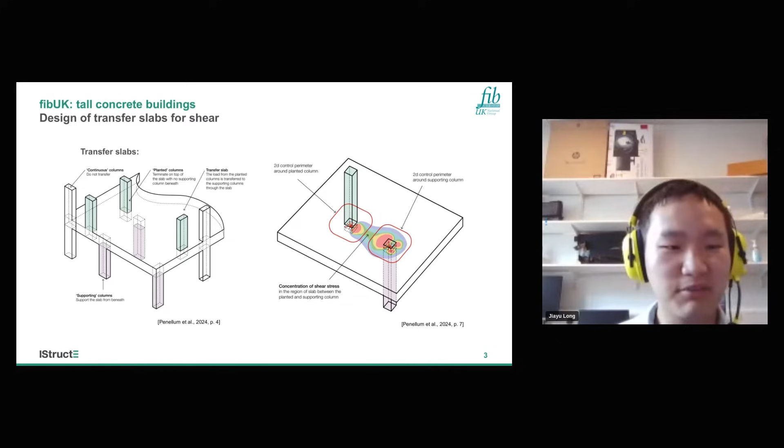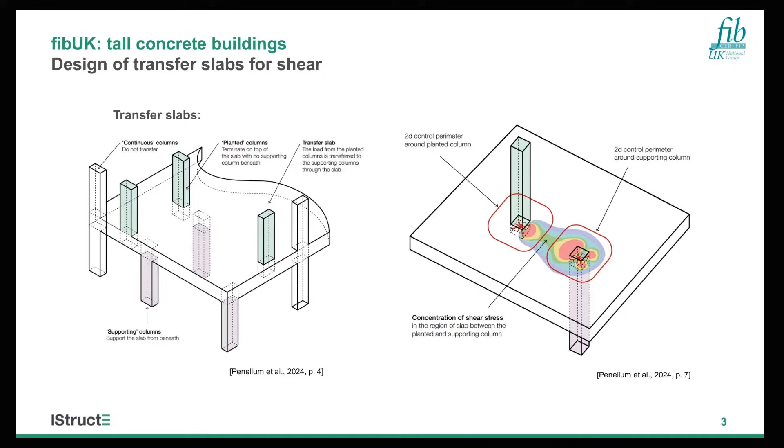So what is a transfer slab? This is a type of structural member often used in multi-story buildings where upper floors and lower floors are of different usages. Each of these floors may require different column arrangements to optimize the space, leading to a deviated column layout. The right figure shows the typical concentration of shear force in a transfer slab. As you can see, it's very complicated, and this complex shear force distribution can lead to different possible failure modes.

Moving back to transfer slabs, the only research on this type of structure is by Wang and Vollum, who looked at transfer slabs with closely offset columns. Their research found that within two effective depths, so within 2D, the shear resistance is increased by the direct strutting action, and the diagonal cracks are reduced. As a result, the concrete resistance is increased by this triaxial compression, but what happens when the shear span is greater than 2D remains unknown.

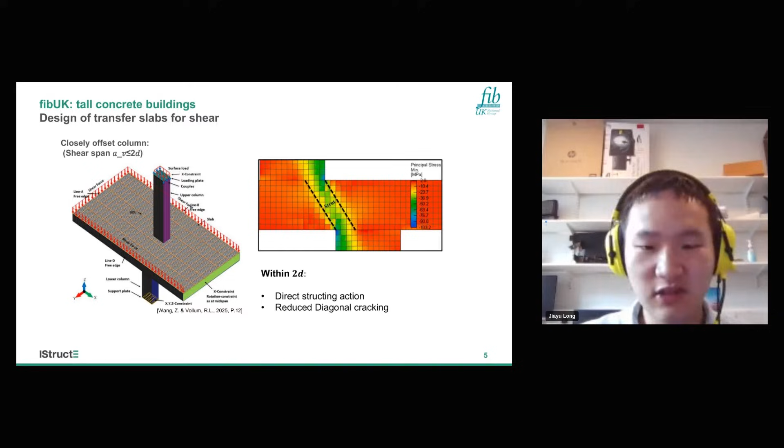To investigate this problem, I use NLFEA software ATENA to determine the failure mechanism. The modeling parameters on reinforced concrete were adopted by Wang, which was validated on previous punching tests, as well as the tests of Wang and Vollum, in which specimens were loaded under combined upper plate loading and perimeter loading, as the figure on the left shows, and detailed material parameters are listed in the right figure.

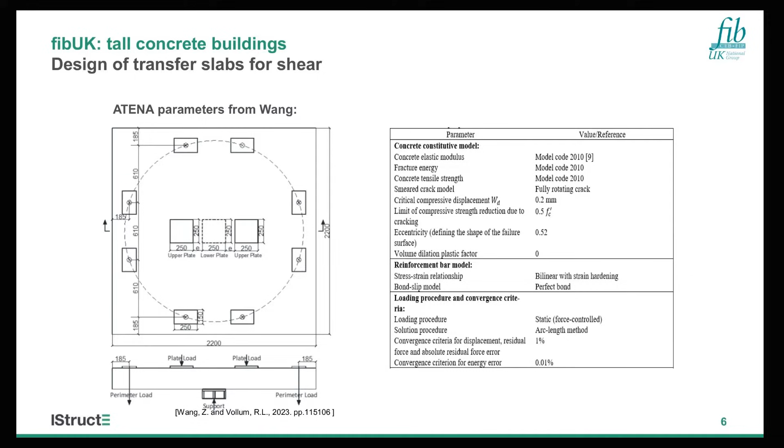We're using a rotating crack model for concrete with compressive displacement of 0.2 millimeter and compressive strength reduction of half of concrete strength.

After that, we started to look at a typical transfer slab structure. The geometry of the structure is as the figure shows. The two major loadings we consider are the upper column load, which is the load induced from the planted column, and the UDL load, the uniformly distributed load acting on the slab.

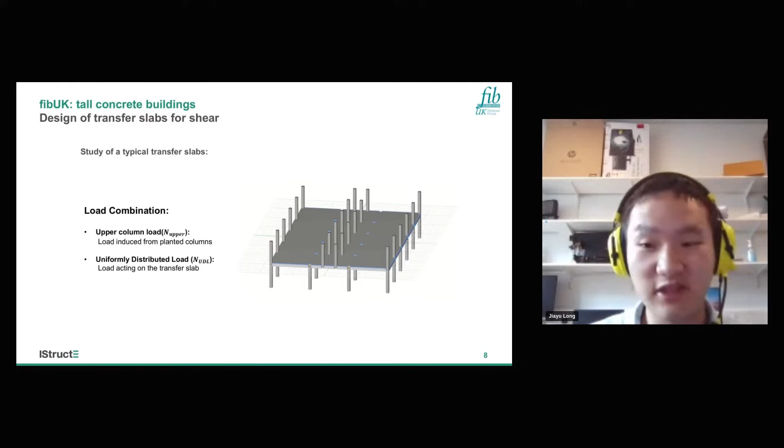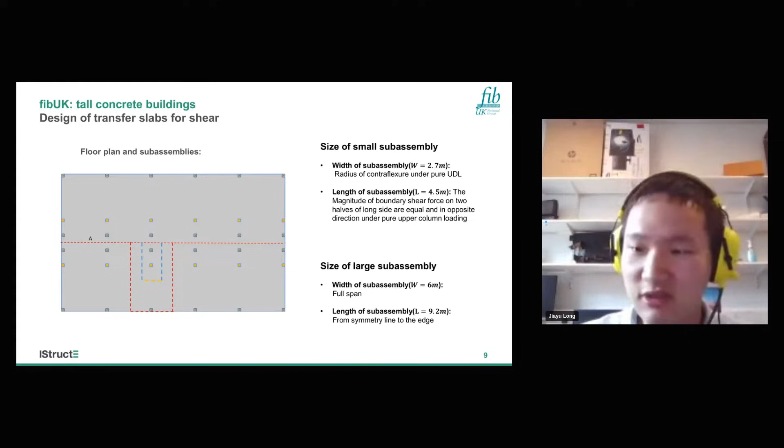The next slide shows the dimensions of the two subassemblies. The material parameters are listed on the left. The effective depth is taken as 400 millimeters. Reinforcement ratio in top and bottom, longitudinal and transverse directions, are all 20 at 150 millimeter spacing. This is a typical reinforcement ratio used in practice.

The lower column is kept at the same distance, and the relative location of the upper column changes so that the shear span varies from 2D, 3D to 4D.

Apart from ultimate failure load, it is also important to know the failure mode of the structure. So what is the failure mode? Is it punching failure or linear shear failure? Does the failure happen around the upper column or lower column? One way of distinguishing it is to examine the critical cracks at the ultimate failure step, but sometimes it can be very hard to tell the difference between cracks of linear shear failure and punching shear failure. For example, as the two figures on the left show, the cracks around the upper column resemble each other, but the top figure is failure by punching shear, whereas the bottom figure is failure by linear shear.

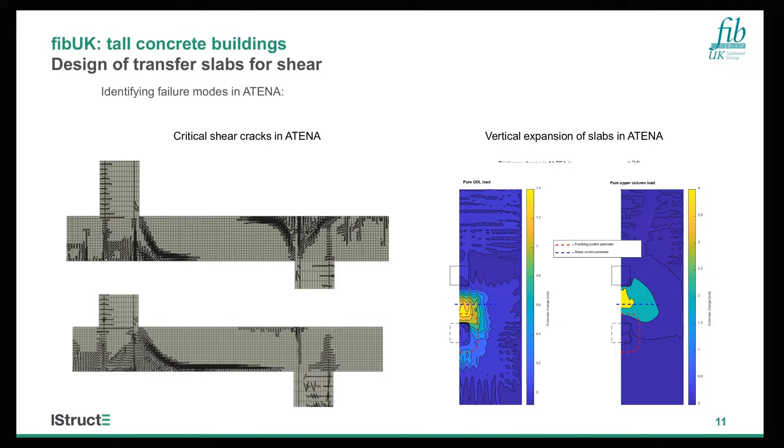So we did extra things to distinguish the failure mechanism. We found out that for the tests in the laboratory, the critical shear cracks are associated with thickness change. A new way to monitor the vertical expansion in ATENA is developed. If there is a thickness change around 0.5D away from the column, then it is likely to be failure by punching. If the thickness change is around 1D, then it's more likely to be failure by linear shear failure.

Moving to the next slide is the interaction diagram of my ATENA results from 2D to 4D gap. The x-axis is the total UDL load on the slab, whereas the y-axis is the upper column loading. The green dots are slabs that failed by punching, and red rectangles are slabs failed by linear shear. On the pure UDL load, so when the y-axis equals 0, all subassemblies failed by punching around the lower columns, and failure loads are similar for small and large subassemblies.

But interesting things happen when the upper column load increases. The ultimate failure load of small subassemblies drops much quicker than the large subassembly. The small subassembly begins to fail by linear shear, whereas large subassemblies are still experiencing punching failure. We believe that the reduction of ultimate failure load with upper column loading is associated with the shift of failure modes.

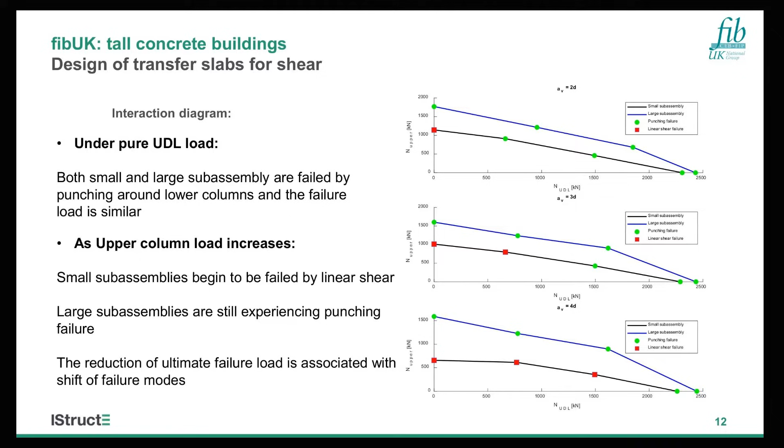It is found out that the failure mechanism is largely influenced by the width of the subassembly. As the width of the subassembly decreases, the failure load decreases and the failure mode shifts from punching shear to linear shear. Besides, the failure location changes from both columns to just around the upper column as the length of the subassembly decreases.

Furthermore, the evolution of shear force over width of the subassembly is compared for each D along the gap. The shear force in the diagrams is normalized so that the lower column axial load equals 1 kilonewton. It is found out that shear redistribution occurs over the 6 meter and 4.5 meter width subassembly midway between two columns, but not over the 2.7 meter wide subassembly. This suggests that the 2.7 meter subassembly does not capture the shear redistribution behavior well.

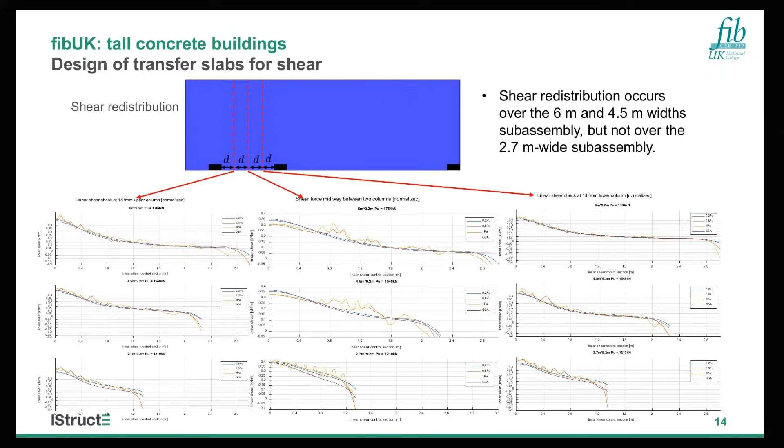Besides, we also calculate the shear resistance using the next generation of Eurocode 2 with LFEA software GSA. The formulas on the left are the shear checks we use for calculation. The punching shear check is made at 0.5D around both columns, whereas the linear shear check is made at 1D away from both columns and midway in between over a width of 4D. When calculating punching shear resistance, there's a factor beta E, which accounts for the concentration of shear force, and it is calculated based on the shear field analysis.

As the right formula shows, the V perp ave in the equation is the average perpendicular shear force. In the calculation, the critical length can be chosen to be either a quarter of the perimeter or a half of the perimeter, denoted as punching half and punching quarter.

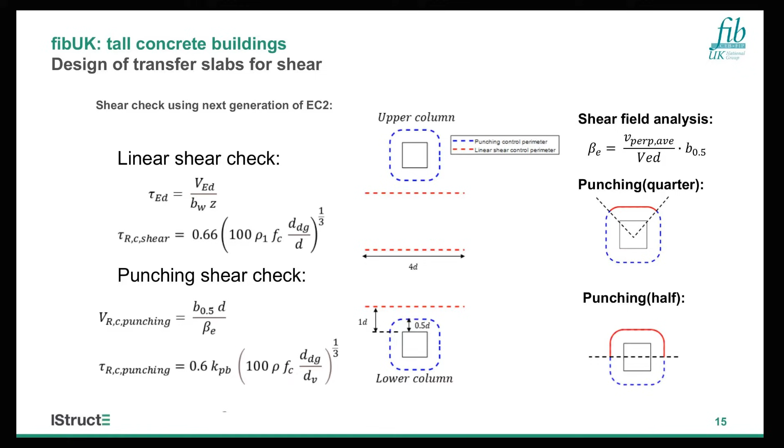As we previously mentioned, there is a huge difference in ultimate failure load for large and small subassemblies on the upper column loading. Although the shear checks in the next generation of Eurocode 2 are actually similar for both large and small subassemblies, different conclusions are drawn for the two subassemblies. For small subassembly, the linear shear check gives reasonable predictions for pure upper column loading, but is very conservative on the pure UDL. For large subassembly, the punching check quarter gives good results.

Here are the conclusions for everything. On the upper column loading, the ultimate failure load reduces as shear span AV increases. For UDL load, the failure load is independent of the shear span. Modeling the large subassembly of full bay width, instead of at the radius of contraflexure, is needed to correctly capture the shear redistribution behavior.

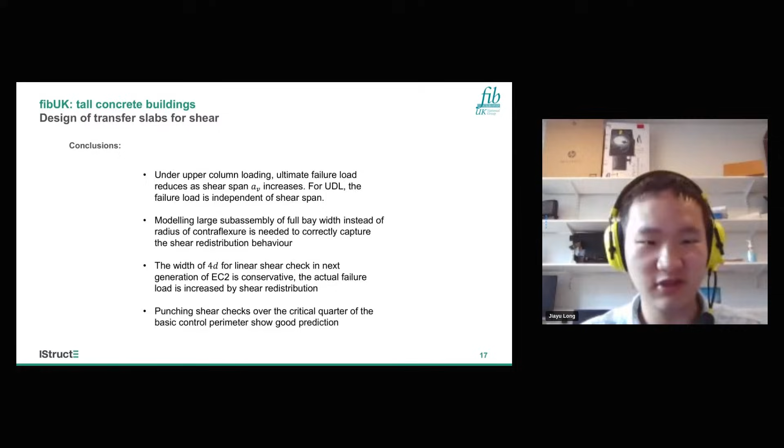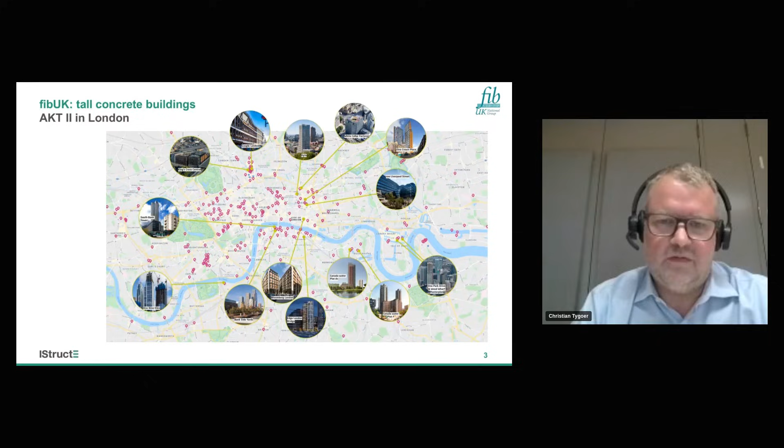Today I'm going to present the Opus building of the Bankside Yards West project. Just a brief introduction to AKT. We are a structural engineering practice based in London, but we also have offices in the UK regions and overseas. Our headquarters is in London, and most of our projects are thus in London as well. With respect to tall buildings, it stretches from the west, from the Nine Elms area, with the One Nine Elms project, which my colleague Pablo will talk about, to the east in Canary Wharf, the Wood Wharf projects over there.

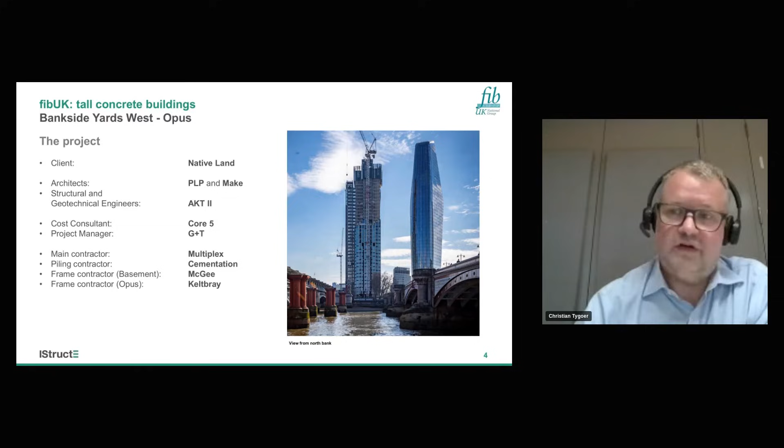Coming back to the project I'm going to present, it's a scheme developed by Native Land with two architects on the site, PLP and Make. And the project has been delivered by Multiplex, Cementation as a piling contractor, McGee's for basement construction, and Keltbray for the delivery of the Opus building.

The site itself is located on the South Bank, just next to Blackfriars, sandwiched between Blackfriars Bridge and the viaduct of the Blackfriars station. On the site, there is the western part of the master plan. To the west of the Network Rail viaduct are three buildings. They're called Building 3, which is a steel tower with 20 stories, Building 2, which is the Opus building, a residential tower, and Building 1, which doesn't quite know what it wants to be at the moment. I think it's planning for like an office scheme.

The ambition of our client Native Land is to deliver a high-end residential scheme with the amenity spaces you'd expect, winter gardens, car parking, and so on, and also to establish in the later stages a connection from the east to the west underneath the Network Rail viaducts.

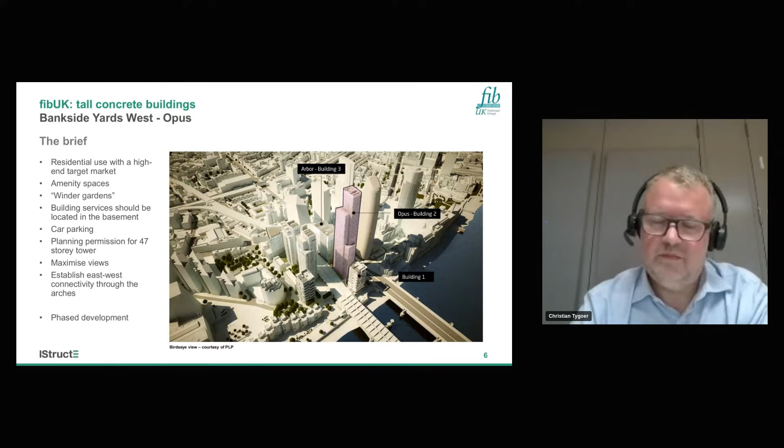The project is to be delivered in phased development and phased construction, starting from the south to the north. Building 3, the Arbor building, has been complete for almost 2 years and is occupied. The Opus building is currently under construction, with the structure being almost complete or near completion.

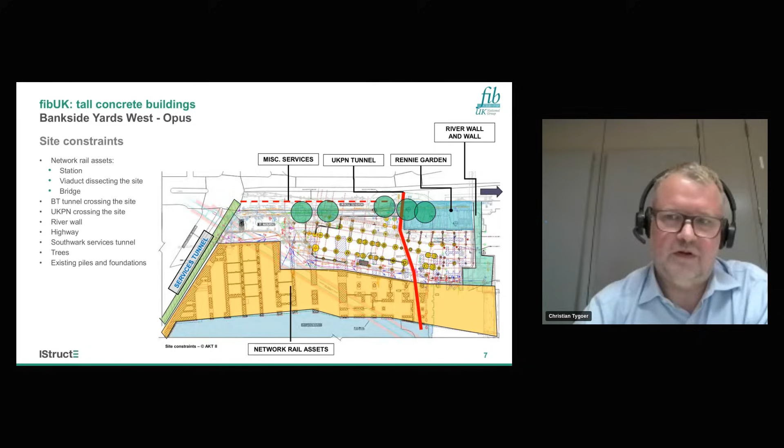As you can imagine, this is an inner city development with many constraints. Just to name a few, we have Network Rail, a BT tunnel crossing the site which we are technically not allowed to talk about, UKPN cables crossing the site which we had to divert, a river, interfaces to the environmental agency, a tunnel to the south, trees, and the existing foundation remnants of the previous development.

In terms of ground conditions, it's what you would expect from an inner city London development, with alluvium, terrace gravels, clays, Lambeth Group, and chalks. We have a relatively high water table because of proximity to the river, and therefore have a close-off basement, which I'll show on the next slide.

In terms of basement structure, bear with me - this is a tall building, so just a few words. The substructure consists of a secant wall, which is all around the perimeter of the site. The foundation system consists of a piled raft, which supports the building on large diameter piles. We have a level 2 basement typically, with a deeper section for a level 4 basement housing a car stacker, and the whole basement is formed in reinforced concrete construction.

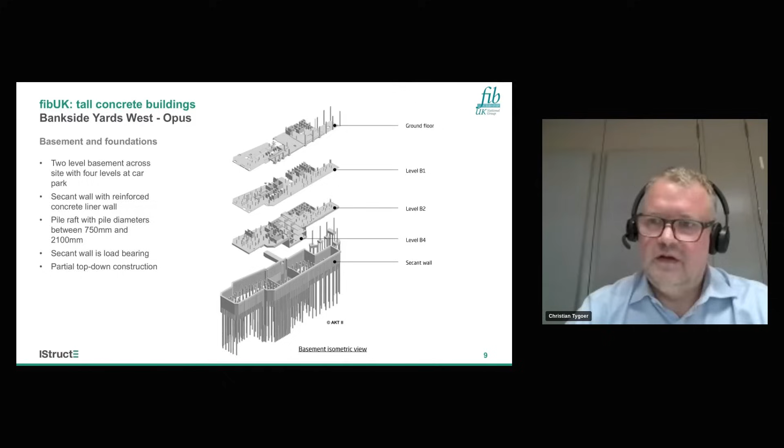The basement, which is largely complete, has been developed in a mixture of bottom-up and top-down construction, with top-down being on plunge columns to facilitate servicing the site in terms of loading areas and the likes, and to get muck and other things out of the site, with cross-propping coordinated with the permanent structure.

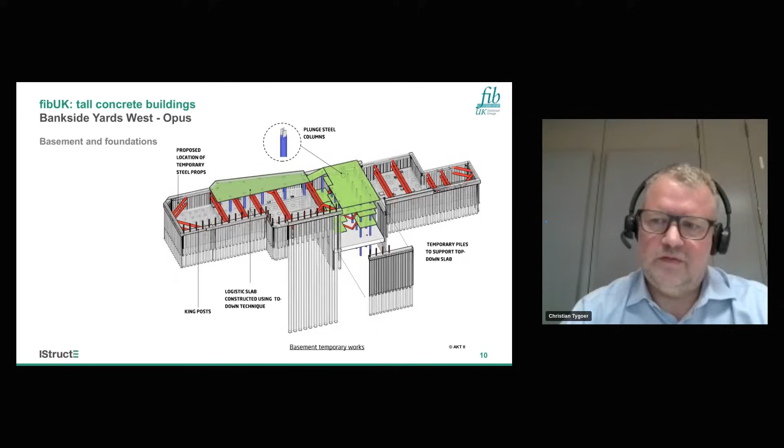As you can imagine, we've been quite busy with all the approvals, and the asset owners - the technical team - spent months refining the analysis and the foundation design, and also going through the approvals with Network Rail, UKPN, and the other asset owners.

Coming back to the superstructure - as you can see on the elevation of the buildings, we've got 49 floors now, with a change in massing at level 21 and 39, so we have setbacks.

The apartment layouts change across the floors, and the mixture of apartment types changes, which requires careful coordination of the column locations. The client's obvious request is to minimize the column sizes to basically maximize the views.

We have a 200 PT slab for the structure, and the core walls - just to give you highlights - range from 600 to 300 mil throughout the building.

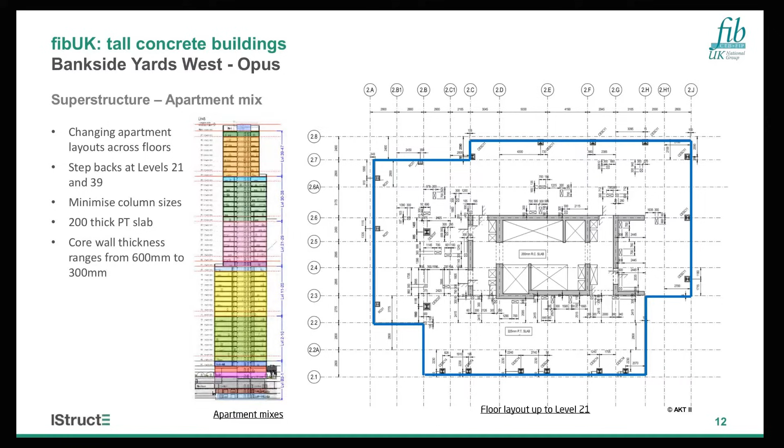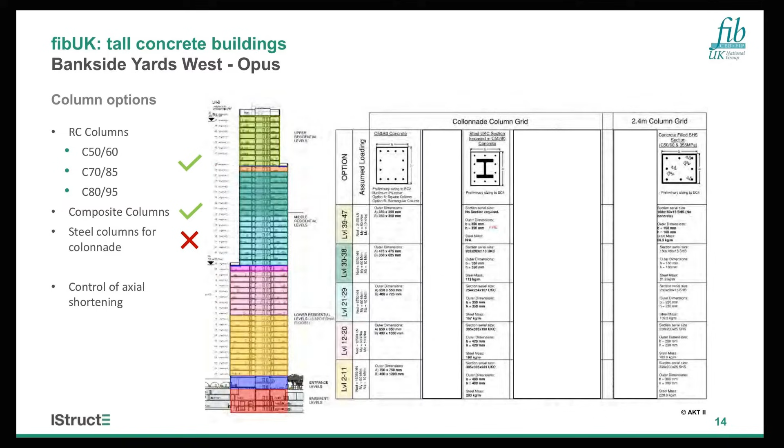We looked at the early stages - I forgot to mention, we started the design of the project at stage 2, concept stage, in 2015 - through various options for columns. We settled in the end for a mixture of reinforced concrete columns of various strengths and composite columns. That was mainly to carry the forces and keep the slimming to the columns small in footprint, and also to control axial and differential shortening with the use of these columns.

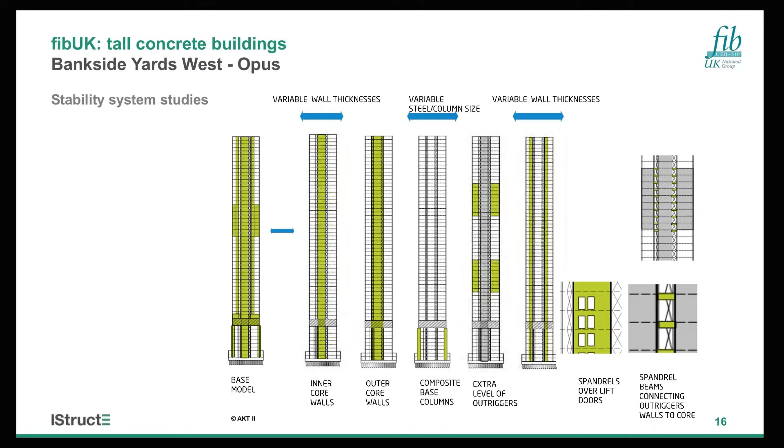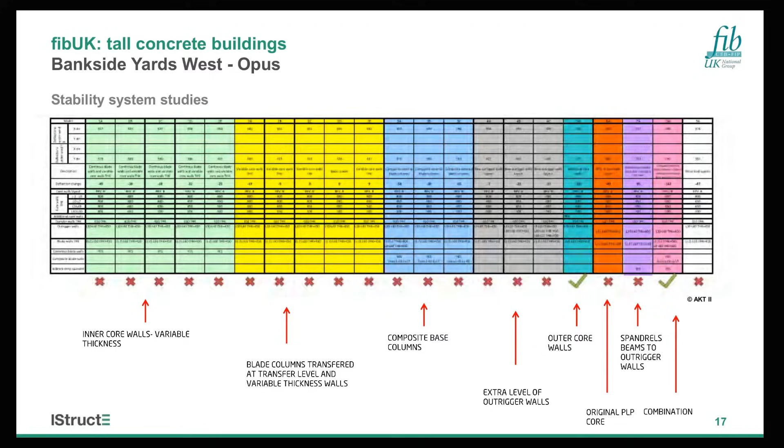We used a catalog of studies and techniques during the design process to explain to the architects the effectiveness of spandrels, changes in wall thickness, and use of outriggers. We carried out a comparison of various options and combinations, probably around 30 options in total, to develop their understanding of which elements of the stability system are important and which ones we can change or modify with an ever-changing core layout.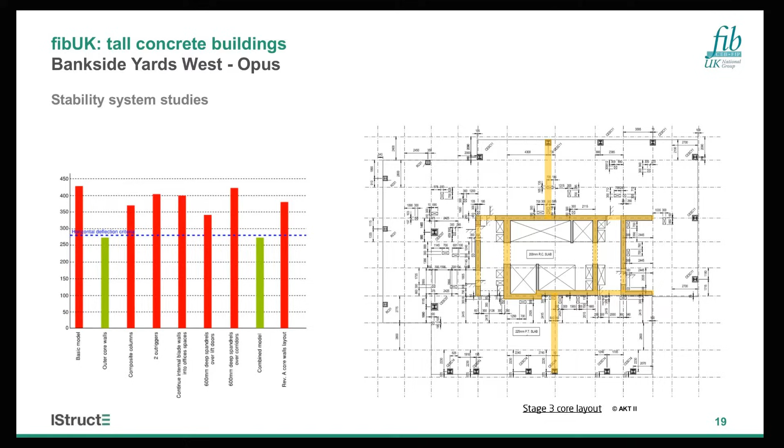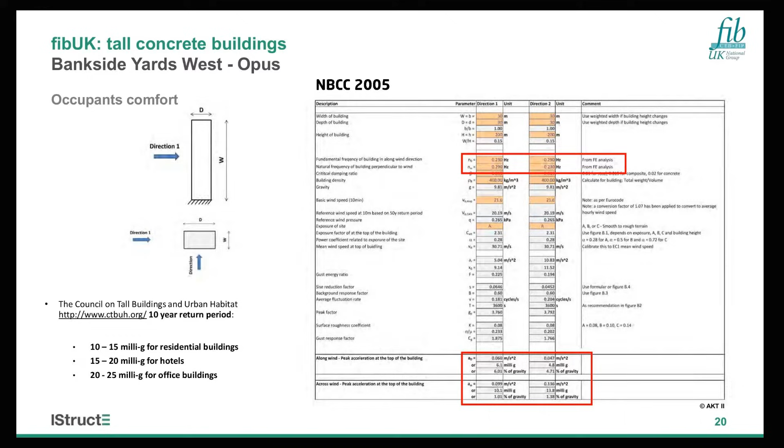The governing criteria at that time was building accelerations, not necessarily deflections and story drift, which we assessed using the Canadian codes. With EU codes we have some provisions for that, but we don't really have a provision for assessing crosswind accelerations.

Towards the end of stage 3, RWDI, who were doing the wind tunnel tests, completed a test to inform our design. Interestingly, we saw a reduction of wind loads in the south and west direction of nearly 50%. If you design buildings in London, you probably know the dominant wind direction is from the southwest.

That in turn enabled us to remove the spine walls in the stability system, and we only needed, after that exercise, one level of outriggers at level 22.

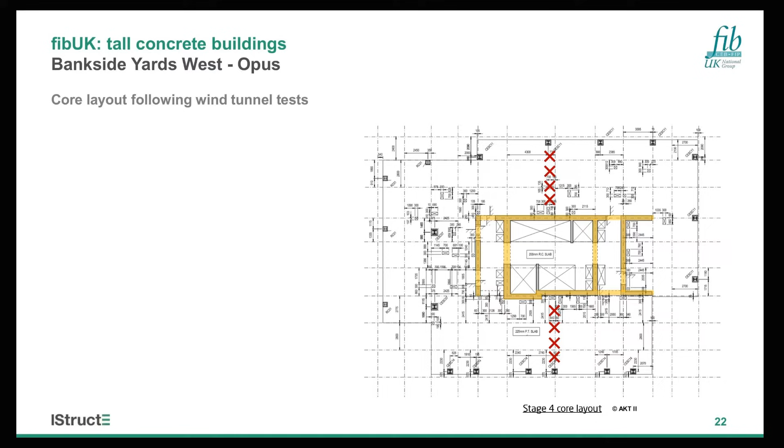Going quickly through some of the floor plates, they're relatively straightforward. Everything is organized around the core, and we have predominantly perimeter columns plus a couple of internal columns.

Then doing a revisit of stage 4, the client felt they had to introduce a second staircase, because that's what the market would probably expect following the recommendations of Grenfell, and we incorporated that quite late into the design of the floor plates.

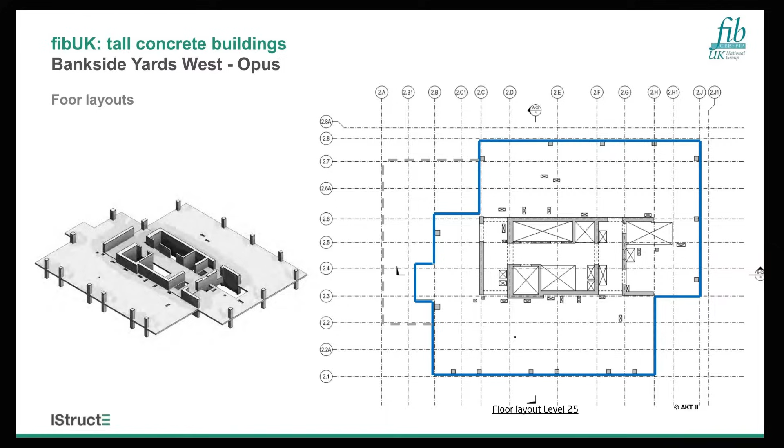You can see how the building and floor plates step back above levels 21 and above level 38, and the core gets more compact when we don't need as many shear walls or core walls for the lateral stability system.

One aspect we looked at closely was the outrigger walls, located between level 22 and 23. As you can see in the isometric here, we don't really have backspans to transfer forces through the core.

So we have to engage the floor plates, and they pick up vertical forces due to gravity, in compression and tension, as illustrated on the sketch. With respect to lateral loads, they pick up reversal forces, compression and tension. So we had to design the floor plates to transfer the in-plane forces in addition to the flexural forces within the floor slab.

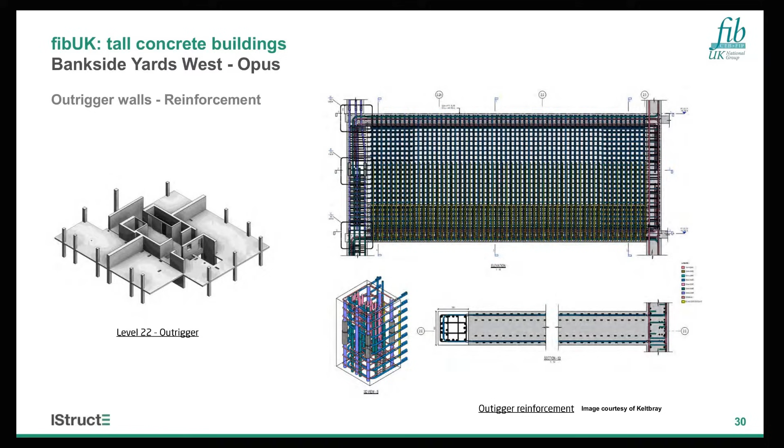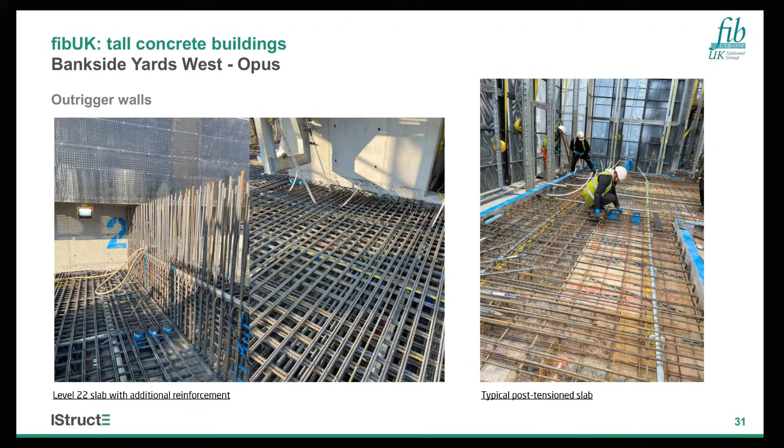This image shows how the reinforcement distribution looks in the outrigger - as you can see, it's quite densely reinforced. You can see here the reinforcement comparison of an outrigger slab on the left-hand side, and the more lightly reinforced post-tension slab of a typical slab. So there's a fair amount of reinforcement required to resist these push-pull forces and in-plane forces in the walls and the slabs.

We also decided to connect the outrigger to the overall stability system at a later stage. We made a leave-out effectively, so that the outrigger doesn't pick up the vertical forces on the upper floors. The connection was made when the superstructure was at level 35.

The main reason for that is that the cladding installation had caught up at that point, being just below level 22. If we had done it any later, it would have been quite difficult to retrieve formwork and essentially do wet trades and pump concrete to level 22.

One critical aspect of tall buildings, particularly in concrete, are movements. On this project, the critical movements we needed to assess are the lateral movements, which are predominantly a result of the uneven distribution of gravity forces, because we have the change in building mass. You can see on the floor plans that sometimes we have no load on one side of a core, or less load, where the building steps back. That results in long-term lateral deflections, which we estimated to be in a region of about 30 to 40 millimeters.

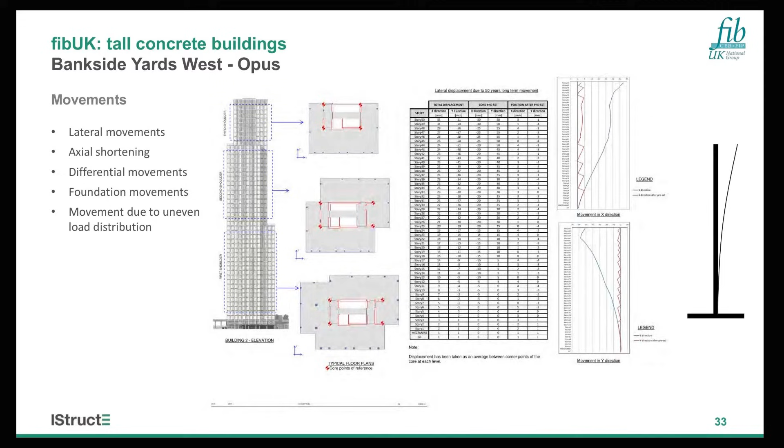You can correct that, as indicated on the diagrams, during the construction stage. So it's just after construction, whilst you build the building, but after that you have to make a provision in your lift shaft tolerances to be able to absorb that movement when they realign the lift shafts and to ensure plumbness.

The other aspect of dealing with issues due to building steps is that you have uneven loading between the columns which carry loads. For example, at level 21, from a superstructure of 20 floors above, and then columns where the building steps out on the terraces, or where the terraces are, which have nearly no load. That creates some challenges with respect to controlling the differential movement.

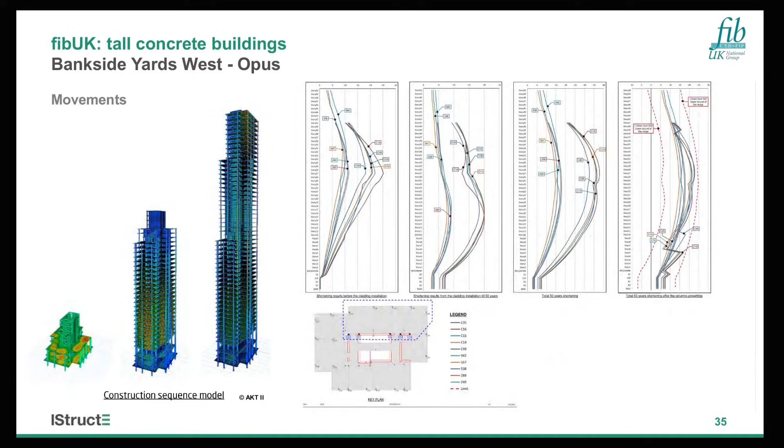We've assessed this using construction stage models in ETABS with material parameters modeling reinforcement, composite columns, and various concrete strengths, and we went through an optimization process to meet these design criteria for differential shortening through the optimization of composite column strengths and reinforcement ratios, which was quite a laborious process.

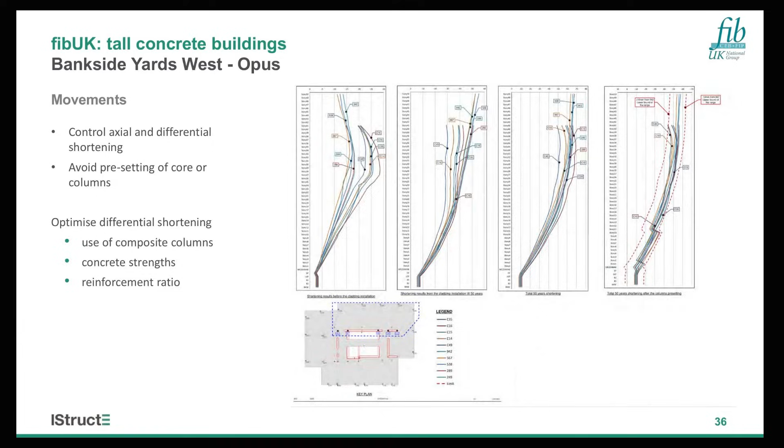That also enabled us, in combination with some value engineering, to remove most of the composite columns above level 1. So the client, in that exercise, accepted a slight increase which reduced the cost quite significantly for the project. We were also obviously interested in checking what we predicted against what we actually observed on site with respect to movement.

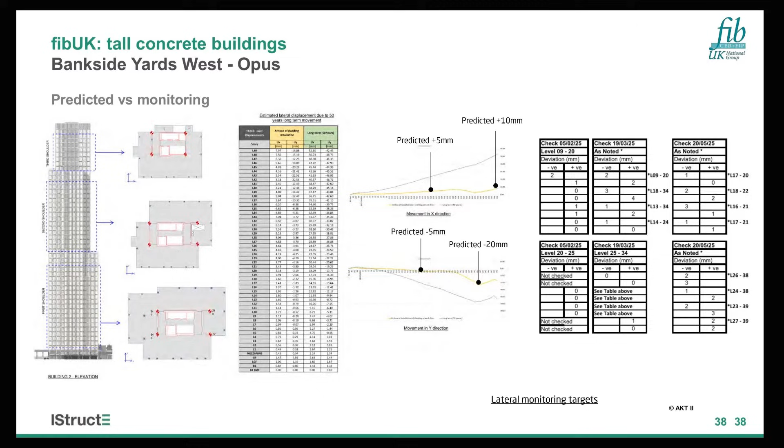We receive regular updates from Multiplex with regards to the verticality of the structure, and we've seen good agreement with our predictions. We predicted at this stage that the core would move laterally by about 5 millimeters, and on the right hand side, you probably can't quite see it, but it's in the ranges between 2 and 4 millimeters in terms of plumbness of the core. So that's a reasonably good agreement.

We've done the same comparing the actual shortening. We have received monitoring data for up to level 40, or completion up to level 40. There's still 9 floors on top of that. And at the lower levels, you can't not see it, but we predicted values in a range of 10 millimeters for the actual shortening at level 10. That's in good agreement.

We slightly, at this stage, over-predicted the shortening at level 20. Considering there's still maybe 9 floors to come, we're probably in the right region within our prediction, which is good news and gives some comfort that what we used in our analysis in terms of stiffness values was adequate.

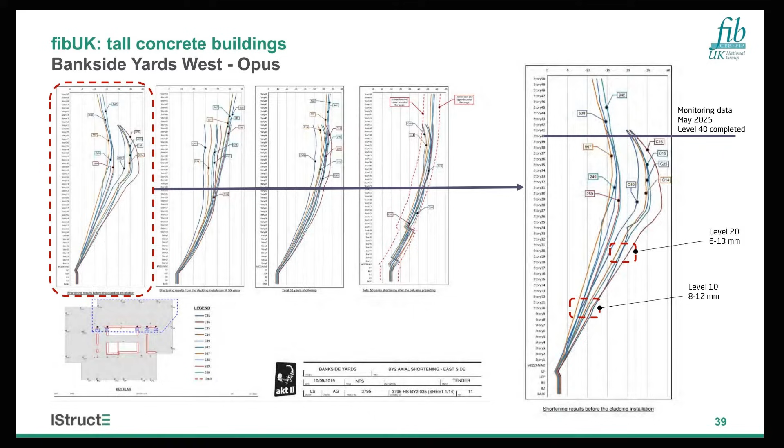When you design tall buildings with high strength columns, you also have to deal with the issue of the joints between the columns and the slabs. There's some guidance from the Concrete Society and also in FIB Bulletin 101 on how to deal with this. But once you use higher or very high strength concrete for the columns, you can't really make use of the enhancement of slab strength given in these bulletins and concrete advice to achieve what you need in terms of strength.

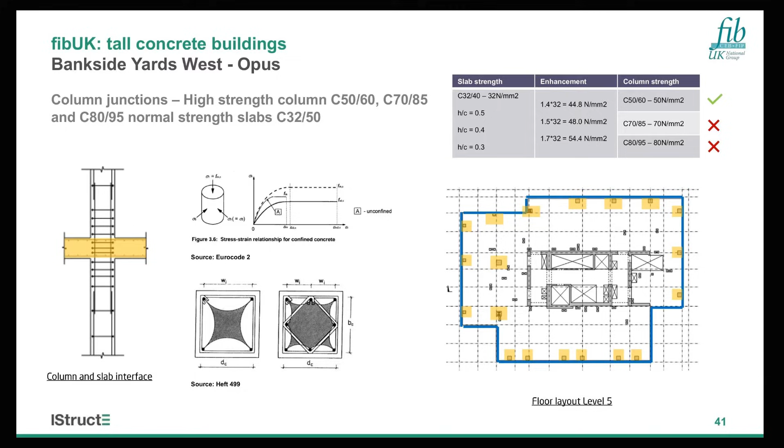Similarly, if you use the enhancement due to confinement by specifying more links, we decided to specify that the slabs around the columns should be cast in higher strength. Whoever has done this before knows you won't really be loved for it by the concrete contractor, and they tend to resist it a little bit. Experience shows you can get it wrong as well, and cast the section in lower strength concrete, which may create issues later on.

Keltbray, when we were bidding for a project, suggested using precast columns, which gets around the issue, using essentially butt joints where the column projects to the top of the slab. That solves some of the issue. On the other hand, it raises some questions about the design of that butt joint. There's not really any good guidance given in the Eurocodes on how to deal with the issue.

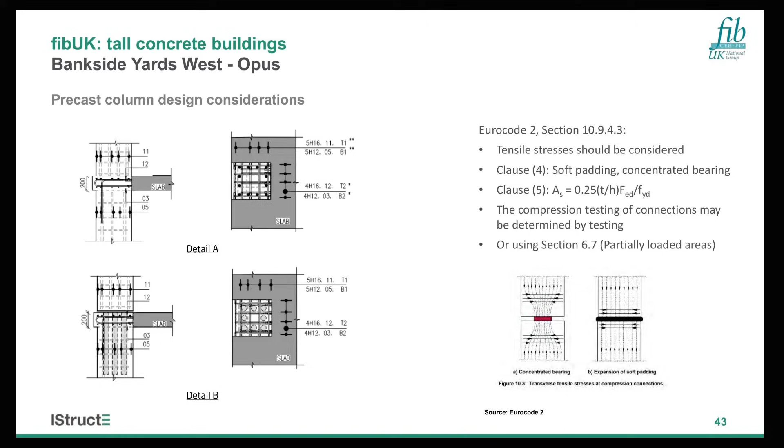There's not really a satisfactory answer we could find anywhere else in UK-based guidance. However, I remembered that I went to Germany and met with a university, at a time when they were building the towers in Frankfurt using precast columns. If I were in Germany, I would follow the guidance in Heft 499 or some documentation in the Checking Engineers magazine.

In Germany, one would specify a steel plate at the end of the precast column, or a steel mesh, to prevent failure modes as shown in the upper center picture of the slide, which is spalling, then a reduction in column cross section, and then ultimately failure. That achieves confinement of the reinforcement. You don't necessarily have to continue other than a continuity bar or tie bar for robustness through that interface.

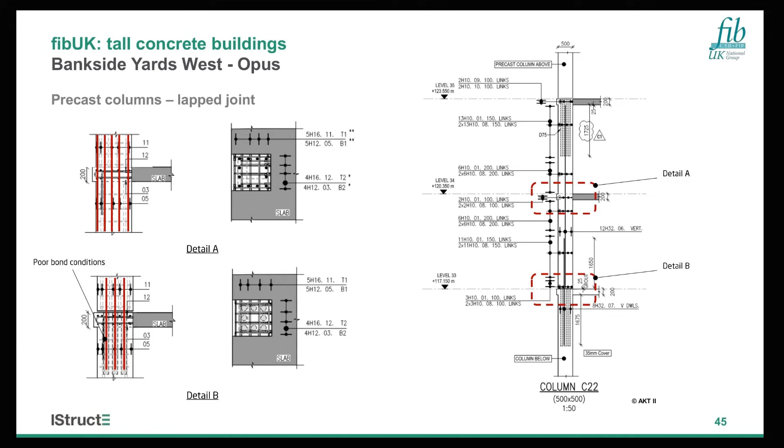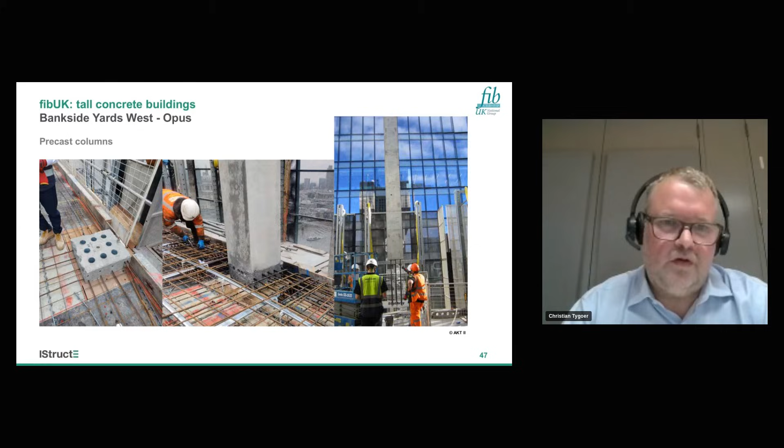We've done this for most of the columns. Some of them we didn't quite get to work, because with that you get a reduction in internal lever arm, which is critical where you have slabs and large moments. So we used the traditional Peikko system, as shown here, being placed on site.

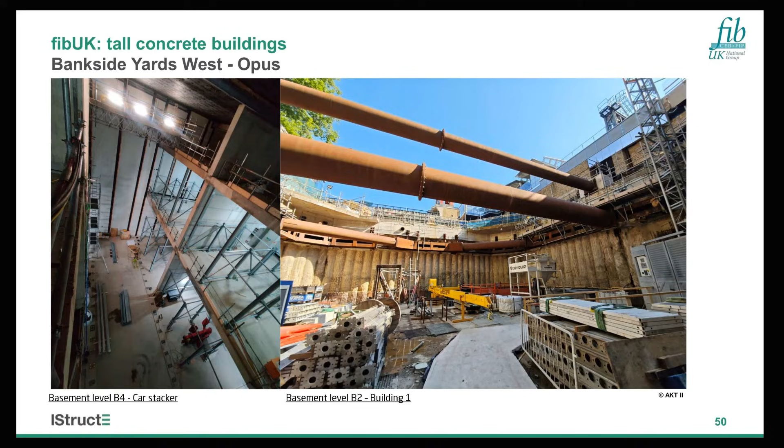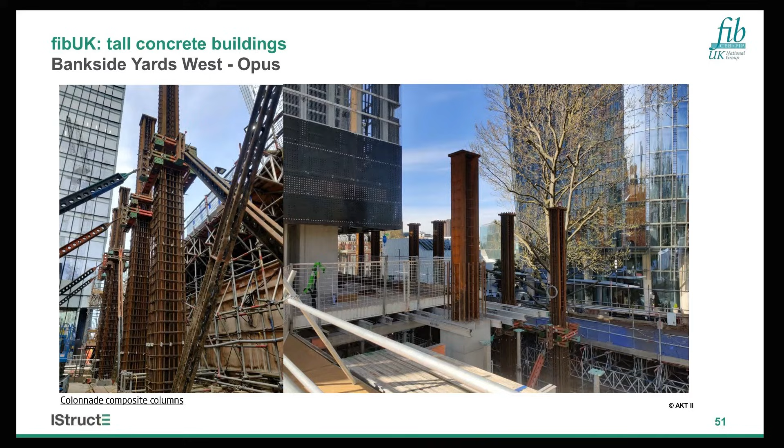That's almost the end of my presentation. I'll just show a few images of the basement construction, on the left at level B4, housing the car stacker, around building 1, which is still open to the air and to the elements, and some illustrations of the base of the building where we have the colonnade spanning our columns, 4 floors being constructed, and some images of the PT slabs and the frame at the early stages. Thank you, that's the end of my presentation.

I would also like to acknowledge the team working on this, with Maria, Alex, and Miguel, who have led our design team from the early concept stages to delivery of the building. We're almost done. I think the building tops out in a month or so, and hopefully it will complete soon.

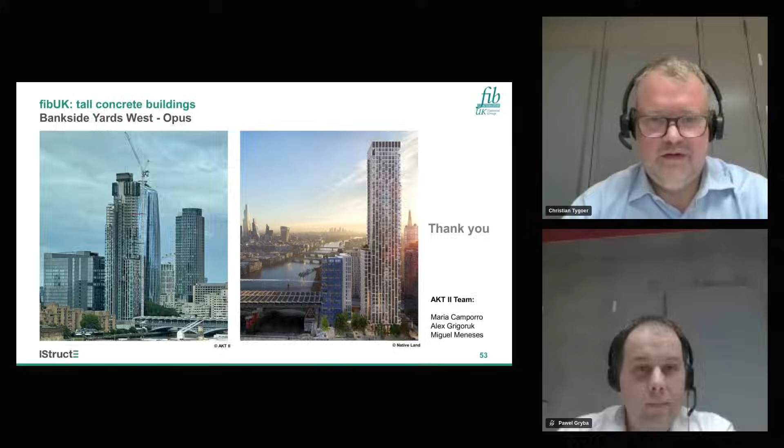My name is Pawel Gryba. I'm working as a project director at AKT. What I'd like to present today is remarkable projects of Nine Elms. So just an introduction to the projects.

We've been working for a client Wanda Group with architects KPF, MEP engineer Sweco, basement contractor Careys, superstructure contractor Byrne Brothers. Piling contractor was Balfour Beatty Ground Engineering, and main contractor Multiplex.

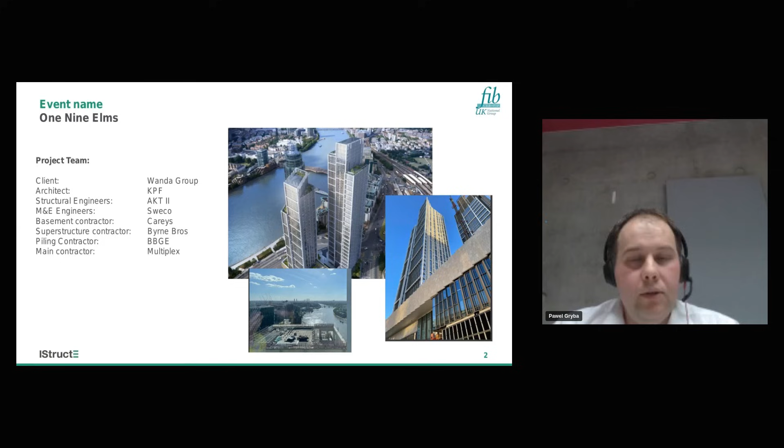Nine Elms is strategically located in the northeastern tip of the London borough of Wandsworth, specifically in the ward of Queenstown, where the site is on the junction of Nine Elms and Wandsworth Road, at the heart of the wider Nine Elms regeneration area.

The development is surrounded by key regeneration projects, including the new Covent Garden Market next to US Embassy Gardens, and the redevelopment of Battersea Power Station to the west. It also benefits from the extended Northern Line station.

Site history: Nine Elms was a swampy, flooded Thames zone. Its name is believed to date back to 1645, when a row of elm trees lined the road through the area. A key historical infrastructure element is a large Victorian trunk sewer which ran east-west beneath the site and remains operational today. Prior to the current development, the site was occupied by Market Towers, a 23-story commercial building constructed in 1975, approximately 88 meters tall.

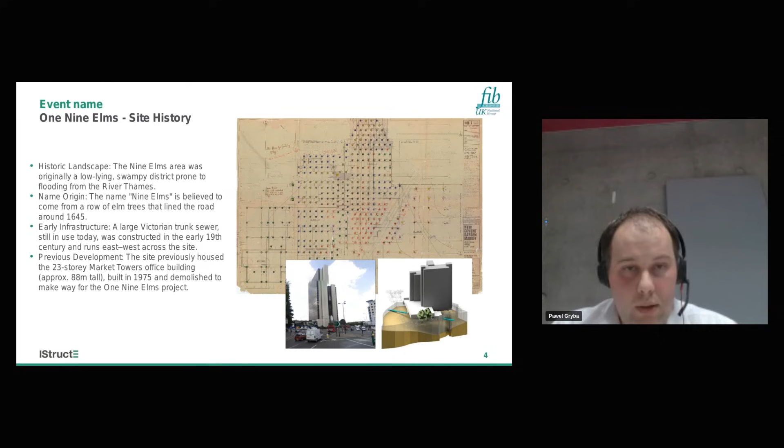The building was demolished for the new development, and we can see this one on the bottom of the photo.

Ground conditions across the area and the site are very complex, featuring two distinct soil profiles. In the western portion of the site, we have typical London stratigraphy, including made ground, alluvium, terrace gravel, London clay, Lambeth Group, and Thanet sand. In contrast, the eastern portion of the site contains an ice age scour feature that disturbs the layering profile, resulting in highly variable ground conditions.

This variability imposed challenges on the foundation solution, and what was proposed on the project was a deep rotary pile, 60 meters below the raft.

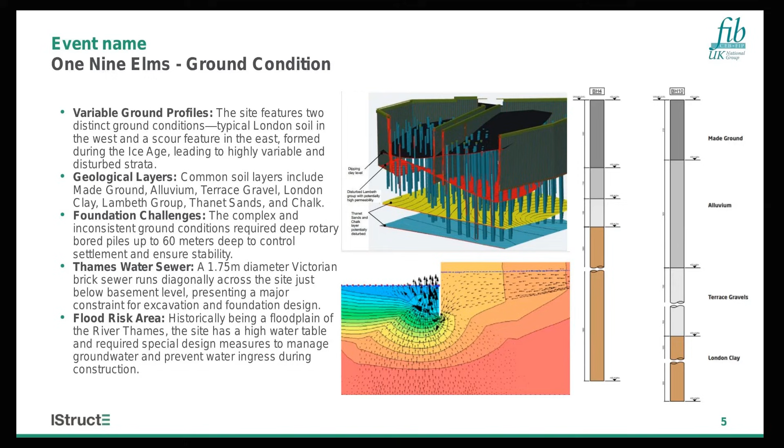The site is very close to the river, therefore it was proposed to use a diaphragm wall to manage the water and create a good seal on the perimeter.

One of the major site constraints was the existing Thames Water Victorian sewer, which is 1.75 meters in diameter and runs diagonally across the site, just below the proposed B1 level. Its shallow depth and operational status meant that diversion, which was proposed at the very beginning of the development, was very expensive, and it was discounted as an option.

As a result, this imposed a lot of challenges, and as one of the towers has columns lying just on top of the sewer, we had to create a transfer structure to bridge it.

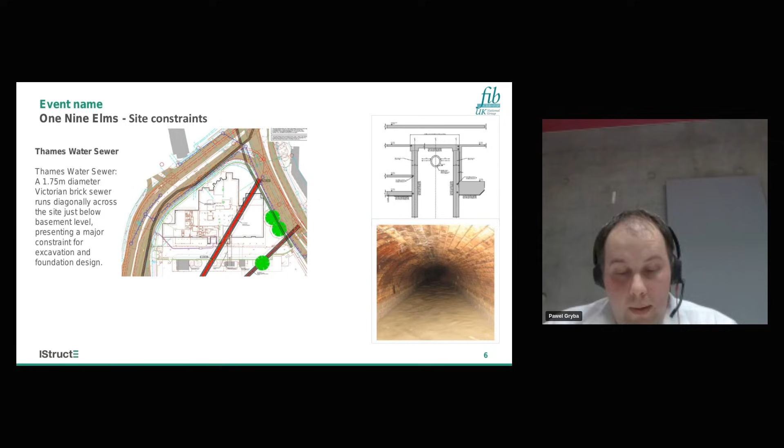So what is the project about? We have two towers. River Tower, which is a 42-story structure, hotel and residential use, approximately 160 meters tall. The second tower is a 57-story structure, residential use, with a plant area on the way. Below, around the River Tower area, we have a podium, which is a hotel reception and residential terraces.

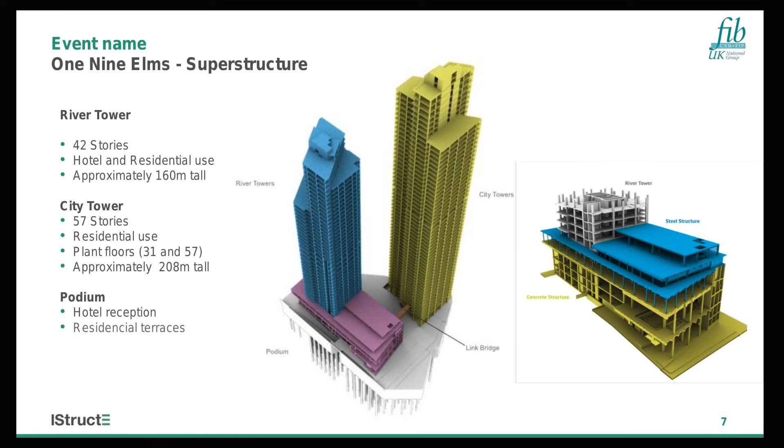City Tower: the height of the tower is 208 meters. It is the taller of the two buildings, and is purely residential. The structural stability system is reinforced concrete core with buttress walls, and in the middle we can see how the buttress walls step back along the height, so not all of the walls go to the top, as the massing of the building steps out.

The floor system is post-tensioned with a maximum span of around 7.2 meters, designed to optimize the floor-to-ceiling zone. The towers employ a combination of composite reinforced columns and RC columns to reduce the area of the structure and maximize the net area. The slenderness ratio of the tower is 6, and the sway target limit is H over 500, to ensure both comfort and performance especially in wind conditions.

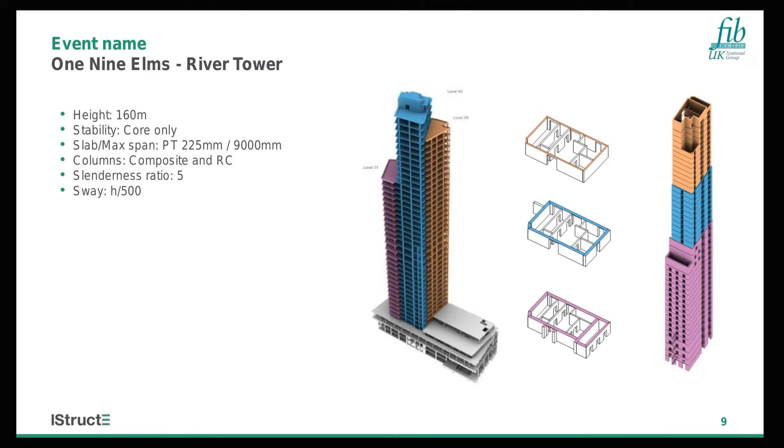Design can be very complex, and this is one of the features we had to address in order to design the structure. We had to test materials, look at tolerances during construction and movements, and control the deflection and sway so that the facade can accommodate this. We had to design the slabs and other elements like composite columns.

At the very beginning, we had composite columns going all the way up the structure. However, through various VE exercises, we had to reduce them. In the superstructure, rather than composite columns, we adopted high strength concrete, which Christian mentioned in his presentation. This imposed some challenges where we have a junction with PT slabs, where there is a different grade of concrete and the PT slab.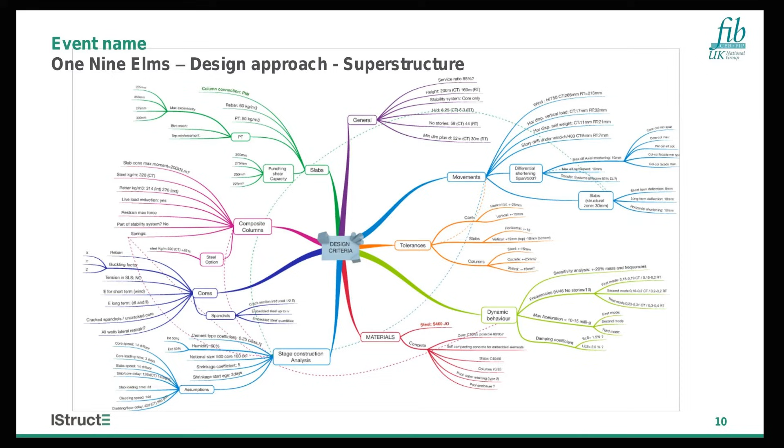Stability elements: the CT tower relies on the core and outrigger solution, while the river tower relies on the core only. At the very beginning of stage 2, we did quite a lot of study to address and optimize the core layout, going through various options. The CT tower's bottom core wall thickness is 750 millimeters, reducing or stepping back through the height of the tower up to 300 millimeters. The river tower's core wall thickness starts at 500 at ground floor level, reducing up to 300 in the top part of the building.

To improve lateral stiffness of the building, we had to look at steel sections embedded in the spandrels. The main reason was in the residential area, where the floor to ceiling height is very small, so the spandrels are quite shallow, and we struggled in the beginning to make it work. However, when RWDI provided wind tunnel results and lateral forces reduced, that allowed us to optimize this further. In the end, we value-engineered most of these elements and used them only in the bottom portion of the tower.

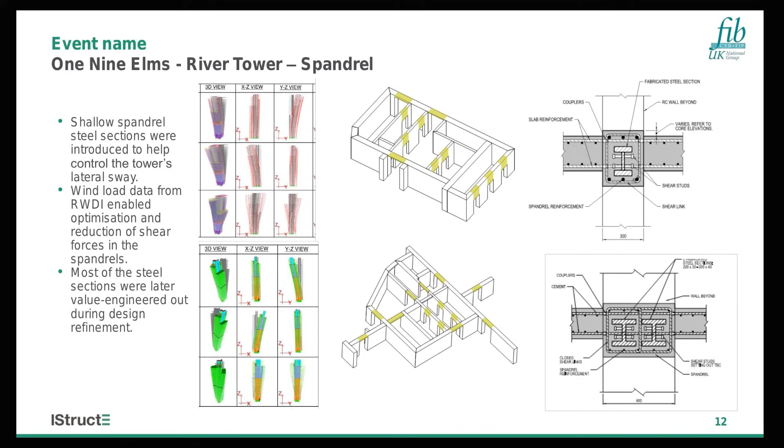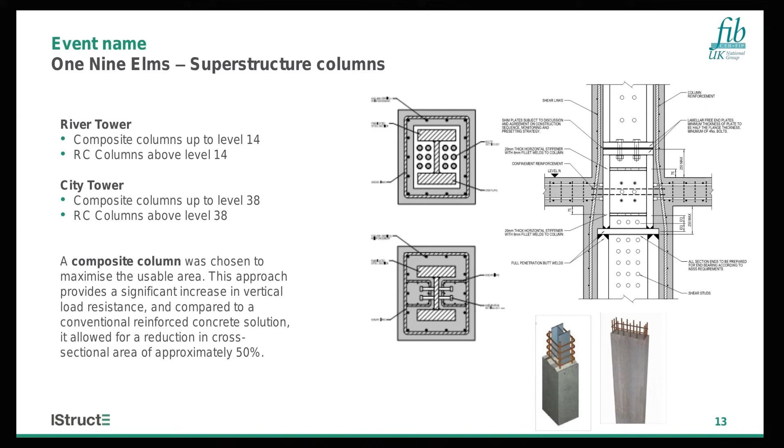Composite columns: at the very beginning of the project, we did a variation and optimization of the columns, looking at the area. In the river tower, composite columns are proposed up to level 14 to optimize the area, especially in the hotel area. For the city tower, there was quite high pressure to gain as much area as we could, which is why composite columns were introduced up to level 38. With the change from standard columns (C50-60) to composite columns, we reduced the area of the columns by 50%.

Substructure: because two towers are sitting on one basement, that creates some challenges for the foundation solution. We had a double story basement, and the two towers were founded on a pile raft. The city tower was founded on a 3.5 meter raft, and the river tower on 3 meters. We'll show more details shortly on this. As a retaining solution, a diaphragm wall was proposed on the perimeter of the building with a variation in depth to get seal and interlock within the clay.

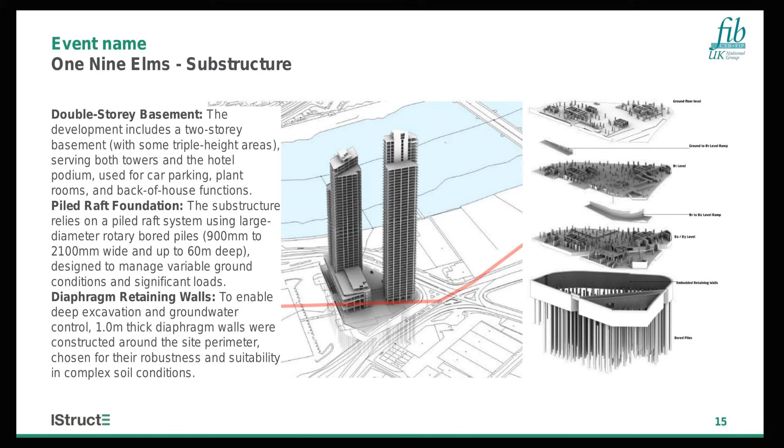As I mentioned at the very beginning, it is quite highly variable clay layer on site due to the scour feature, and the difference in height between the panel and the clay is sometimes up to 7 meters on site. What we're seeing here on the left-hand side is a forest of piles. This is mainly because the existing structure, a 23 story market tower, was founded on 900 shallow pile foundations, and these piles were pretty much cored through to allow for the new development. We could not use the existing piles because from the excavation there was just 6 meters of piling left without any reinforcement.

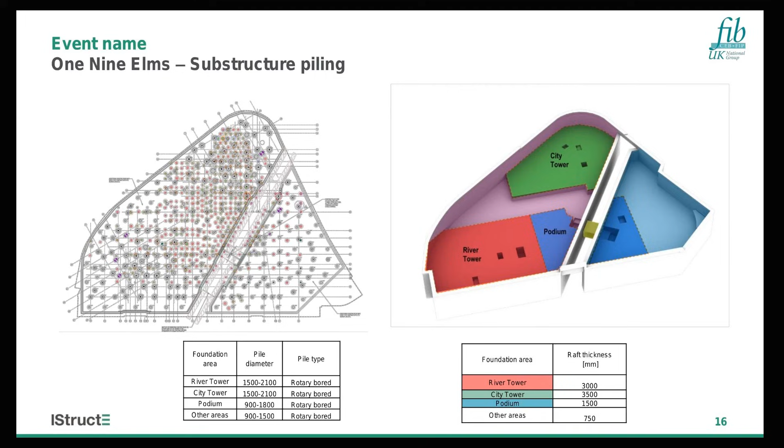So we had to put in large diameter piles going to the tunnel. In the river tower area, pile diameters range from 1500 to 2.1 meters, all rotary bored. The city tower is also from 1500 to 2.1 meters. In the podium area, it's 900 to 1800, and in other areas, 900 to 1500. Because of the top-down methodology, we had to increase certain pile diameters to allow for plunge column installation. On the right-hand side is the average thickness of the raft: river tower is 3 meters, city tower is 3.5 meters, podium is 1.5 meters, and the remaining area of the basement is 750 millimeters.

Because of the complex ground condition, we had to do soil structure interaction, and we did this one with 3 different software packages. The ground model was done in Plaxis. We developed this one and sent the spring stiffness and the solid stiffness into Sofistik, with the loads from the construction sequence from ETABS.

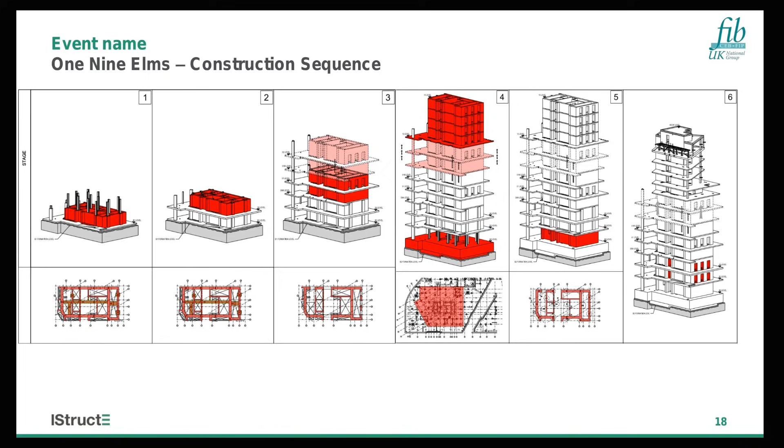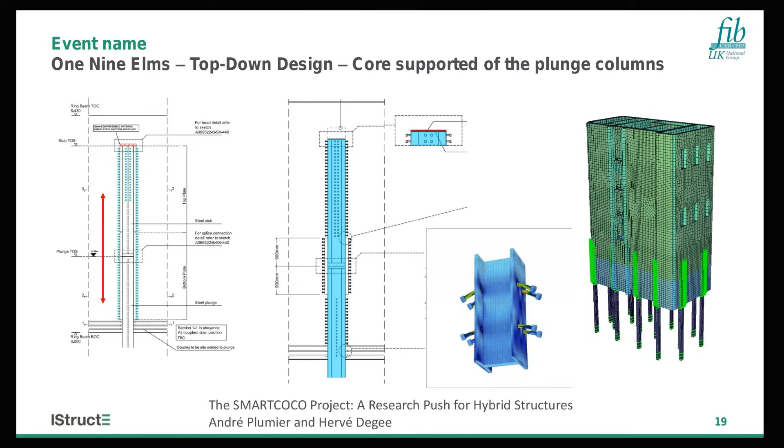What we're seeing here is part of the ring beam design which we did in Sofistik, because there is very little guidance in Eurocode on how to design these elements. We used research from the SMARTCOCO project, where they tested how plunge columns behave within the walls with the shear studs.

Because of the volume of the raft, River Tower and City Tower, the raft was poured continuously. That meant 4,852 cubic meters of concrete poured in one go. It took pretty much 30 hours to pour the raft, with 642 wagons of concrete. So that was quite heavy traffic, and it was a continuous pour.

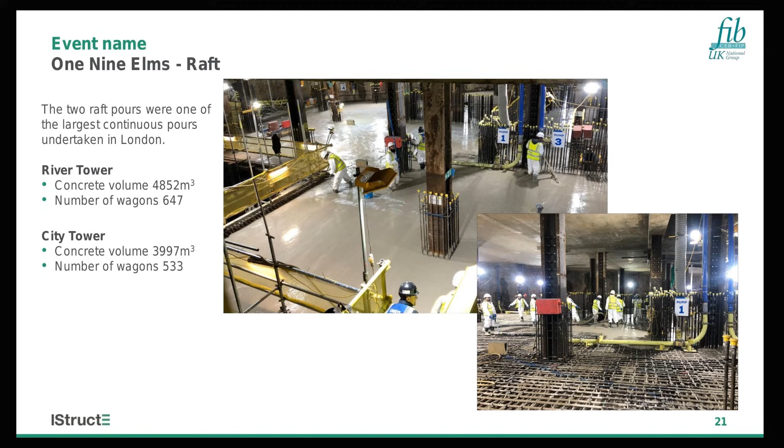That was quite an interesting experience for the contractors, subcontractors, and us, as we were present on site.

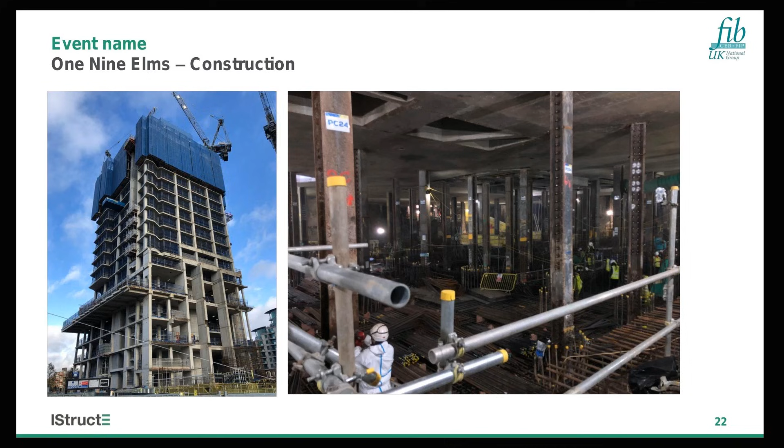Through the concrete placement, we found some issues in the ring beam elements. It was quite dense with reinforcement, and we found issues with the concrete placement. Honeycombing was observed, and not everywhere did we have full concrete coverage. As a result, investigation was required. We took quite a lot of core samples through the core, and an independent expert from the concrete center service was brought in to advise on a methodology for how to repair this.

Some of the interesting stuff: on one Saturday, during the demolition of the infills in the ring beam, the demolition contractor cut permanently through a permanent spandrel. That imposed a lot of challenges for us in how to reinstate this in the permanent condition, especially since we had steel sections and quite a lot of reinforcement. So it was heavy welding on site.

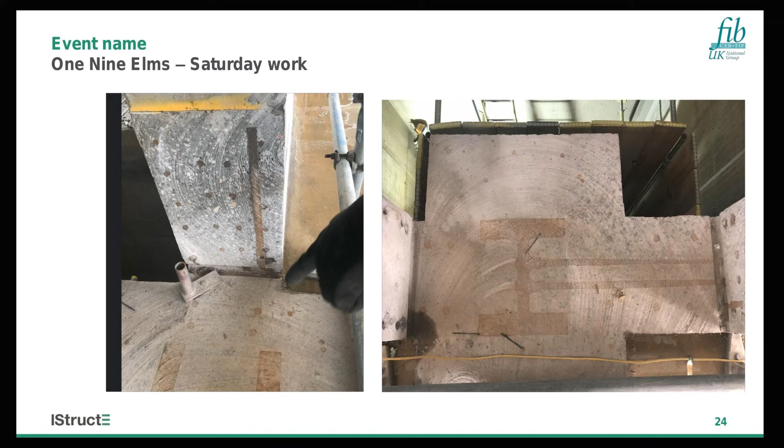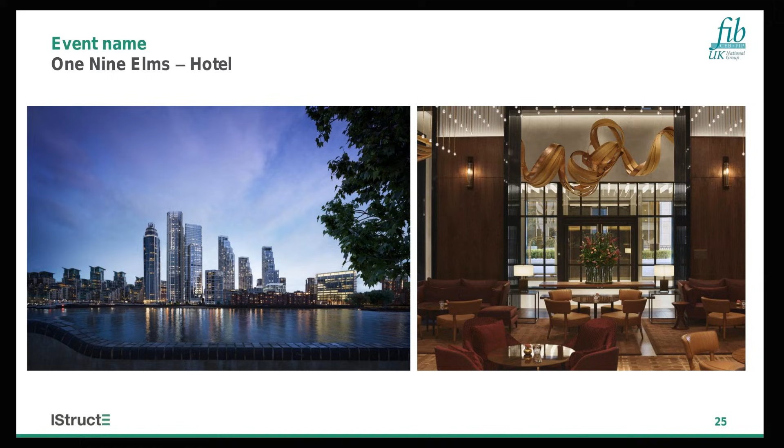I'd just like to show a few photographs from the hotel, because the hotel is operational now. It took us pretty much 10 years to design and construct on site, and here are some views from the apartment. Towards the end of the design journey, after the building was pretty much complete, we tried, with the design team, to climb up from B3 to level 57.

It took us 21 minutes. The record, I believe, still stands for Multiplex, because one of the guys climbed up in less than 7 minutes. So thank you very much for your time.